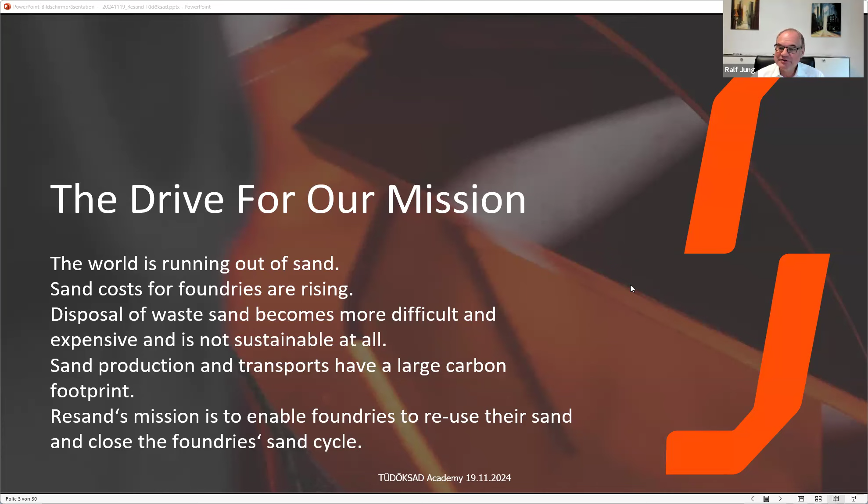Sand production and transport have a large carbon footprint, and more of the foundry customers demand the foundries to reduce that carbon footprint. RESAND's mission is to enable foundries to reuse their sand and close the foundry sand cycles.

We have about 50 billion tons of sand mined every year, and this is a limited resource. We see high carbon emissions for the production and transportation, and an increasing challenge for foundries to dispose waste sand. In some countries, like in Spain, this is going to be banned in the near future. Therefore, we believe that reclaiming the sand in the foundry is the most sensible solution you can have.

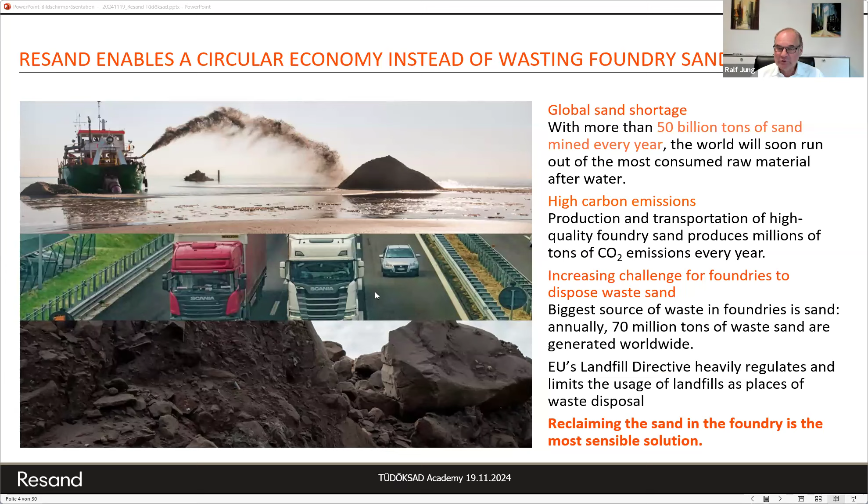Why do we do what we do? The company RESAND's former name was Finn Recycling, and it was a scrap dealer.

When Tony Vezin, the founder, was delivering scrap metal to a Finnish foundry, he was asked if he could help with the sand as well. Because in Finland, you don't find quartz sand in high quality. Most Finnish sand contains a lot of feldspar and therefore has very poor thermal properties, and it can't be used in a foundry. So the Finnish foundrymen have to import their sand normally from Belgium or from Germany, and then it has to be put on a lorry, shipped to Finland using a ferry, which makes the virgin sand very expensive when it arrives in Finland.

RESAND was founded as Finn Recycling more than 10 years ago, providing metal recycling service for the foundries. And then after Tony was asked to do something with the sand, he had a chance by acquiring a former glass factory in Nuutajärvi.

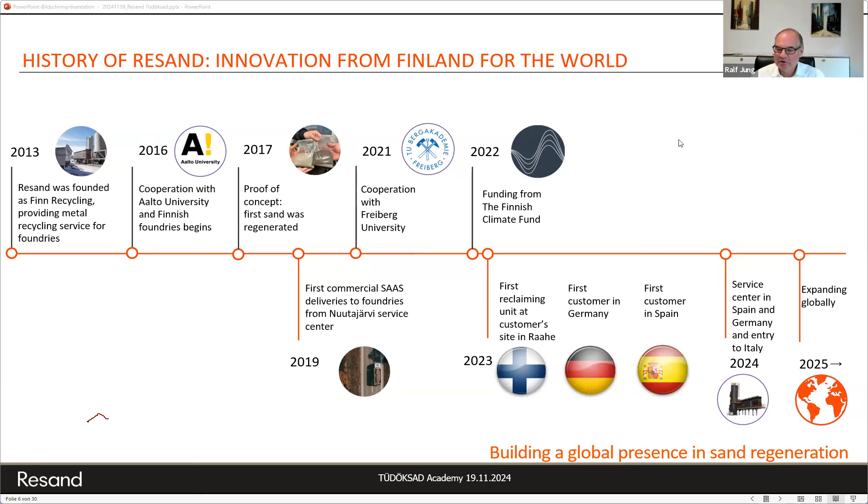Our technology. What's basically the idea? Tony Vezin started the development together with 5 Finnish foundries. So it's not just an academic approach, but it was basically the foundrymen's demand. They wanted a continuously operating, easy to install, automated system which needs no operators, because people are expensive in Finland. And the quality of the reclaimed sand should be so good that it bears no risk for the casting process.

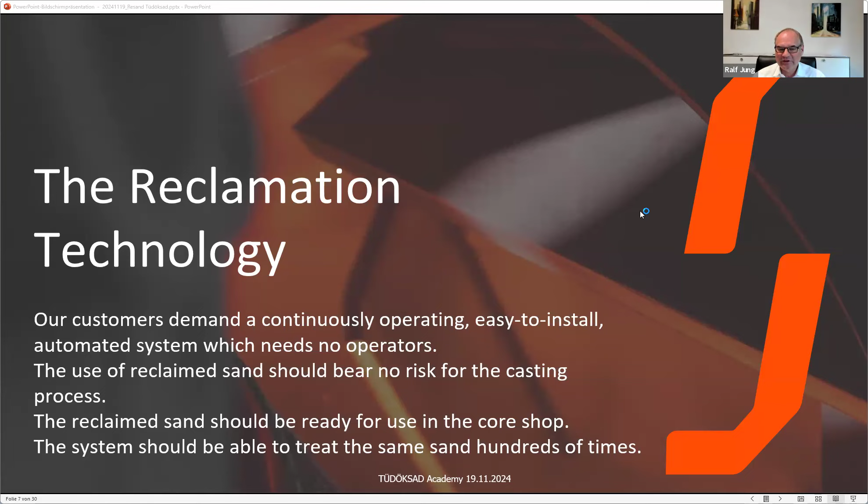Basically, the reclaimed sand should be ready for use in the core shop, mainly cold box core production. And the system should be able to treat the same sand hundreds of times, because when you always have to replace 5 or 10% of the sand, you'd have to import again from Germany or Belgium, which your foundryman didn't want to do. So we had some border conditions, for instance, the grain size distribution, which shouldn't be affected by the process.

So what's basically the model: molds, casting, pouring of the iron into the mold, cooling and unpacking, and then in general 70 to 90% of the sand can go back to the molds for mechanical processing. Normally, the fresh virgin sand is introduced into the foundry sand system by core making. But if you get new sand into the system, you have to take out the same amount of waste sand and put it to disposal and landfill to keep the system at a constant filling rate.

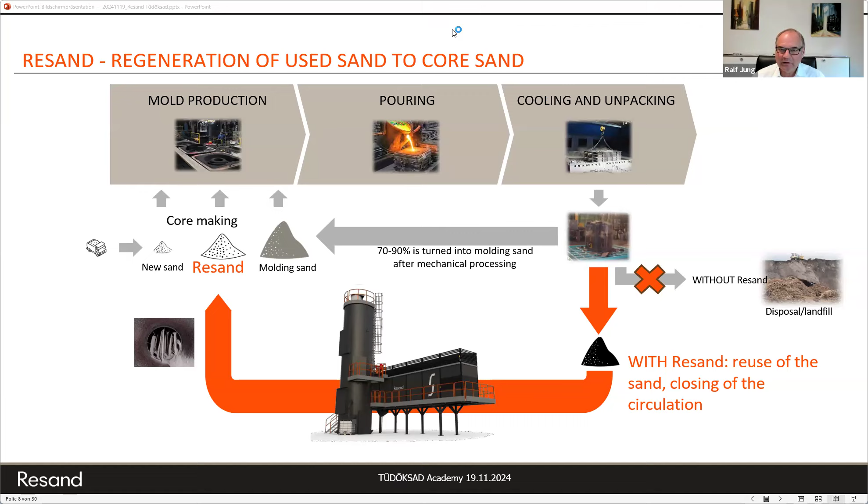So our technology is basically about treating the sand to reuse it in the core shop. How do we do it? We basically use a twin drum system for thermal mechanical reclamation.

The first step, the upper drum, the heating drum, is cleaning the sand with thermal reclamation. Everything, including the binders and additives which are combustible, are burned in the heating drum. Then we have dedusting and cooling in the second drum.

But as you can see in the picture of the dedusting drum, there's a little bit more than just an empty drum. There are things in that drum which allow the sand to be in contact with other sand grains to clean the surface, and dedusting happens there as well. So we get a clean silica sand ready for use again, but we don't grind anything. We do not affect the grain size distribution, apart from taking some fines out with the dedusting.

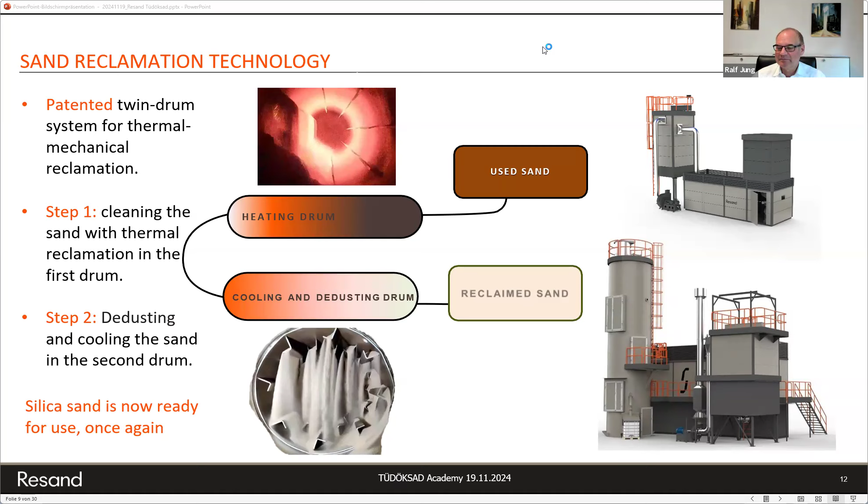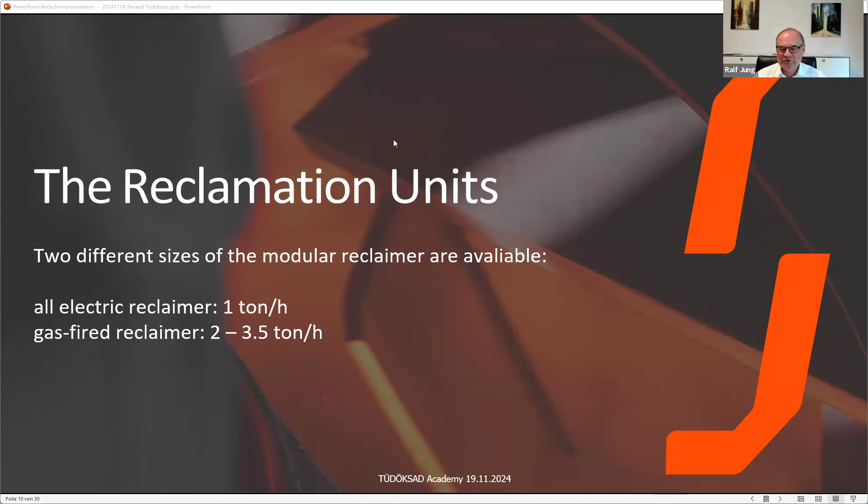Now you see the reclamation units we have. There are two different sizes available. We have an all-electric reclaimer with a capacity of about 1 ton per hour, and a bigger gas-fired reclaimer with 2 to 3.5 tons per hour. But of course, you can put 2 or 3 of the electric reclaimers in parallel if you don't want to use gas, which some of our customers, especially German ones, want to avoid because they don't want any carbon production in their system.

So let's start with the small electrical reclaimer. It's a completely digitally controlled unit. It's electrically heated, but not just heated, it has temperature zones with an electrical heating capacity of max 250 kilowatts. The zones and the regulation are controlled by constantly measuring what's going on in the system, as well as the exhaust fumes coming out, because we have to control the residual oxygen level.

There's a lot of process control involved in that to get the proper sand cleaning conditions, to acquire the proper conditions for the reclaimed sand.

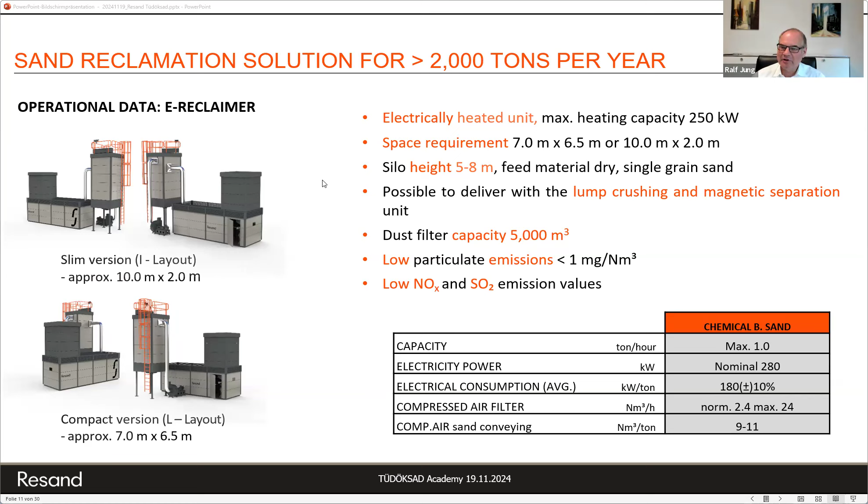This electrical machine is rather small. In an I layout, it's about 10 meters long including the dedusting unit, and 2 meters wide. You see the lower block is 2 drums, then the feeding silo and dedusting unit on the side. What we basically do with that is treat mainly chemical bonded sand for smaller foundries, like Furan or Alphaset or anything like that. We can do about 2,000 tons per year with that machine, which is for a medium-sized foundry.

All these machines can be placed outside, even in the harsh Finnish winter, so that you don't need to waste any space in your production hall. You can just place it near your core shop or near your shakeout to run it there.

All the particulate emissions are so low that the machine can be run outside, since it doesn't grind anything. The main noise emissions are basically from the dedusting, the ventilators from the dedusting system.

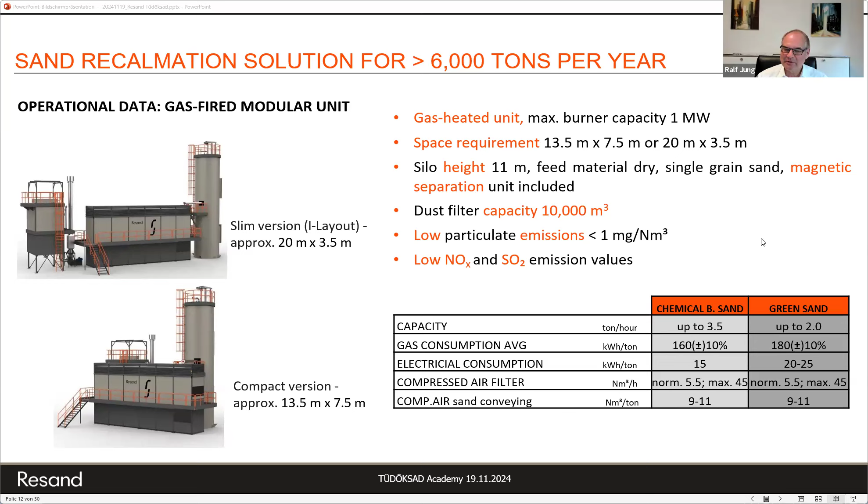For chemical bond sands, we can treat up to 3.5 tons per hour. For green sand, it's a little bit lower, because green sand normally contains some moisture and has to be dried first, which takes a little bit of the peak capacity. But in the end, we need dry single-grain sand. A magnetic separation unit is included because we don't want to have metal and scrap in the drums.

The main thing, if someone wants to run such a sand reclamation system, is that you can test the sand before. RESAND is not an equipment manufacturer, we are sand process specialists, so you're not buying hardware from us. As you may know from other companies supplying hardware to foundries, they turn the key and say, well, the equipment works, now it's your turn to find out how to run it.

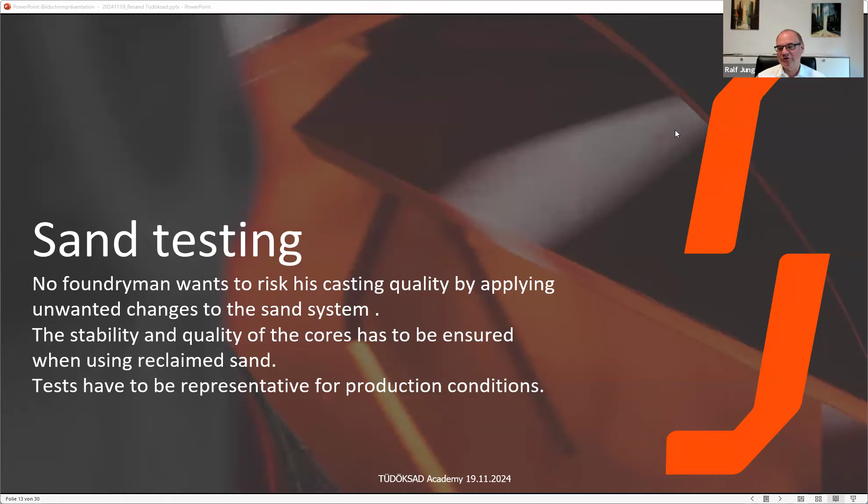This is why we put a production site machine in Germany, because Germany was our first target market after Scandinavia. In Scandinavia, foundries can bring their sand to the Nuutajärvi test center, where it can be tested under production circumstances. But here in Germany, we put a production scale machine at Freiberg University.

So German foundrymen can go there and see what happens to their sand, and just see what's coming out of the machine. We can run batch sizes of 5 to 10 tons. You can really do casting tests with the reclaimed sand, not just lab tests. It's a production unit.

Joint on-site testing. We have all the parameters that can be measured and shared, not only the sand parameters, but as well the exhaust gas parameters, and you can get the sand back for casting and test it in your molds.

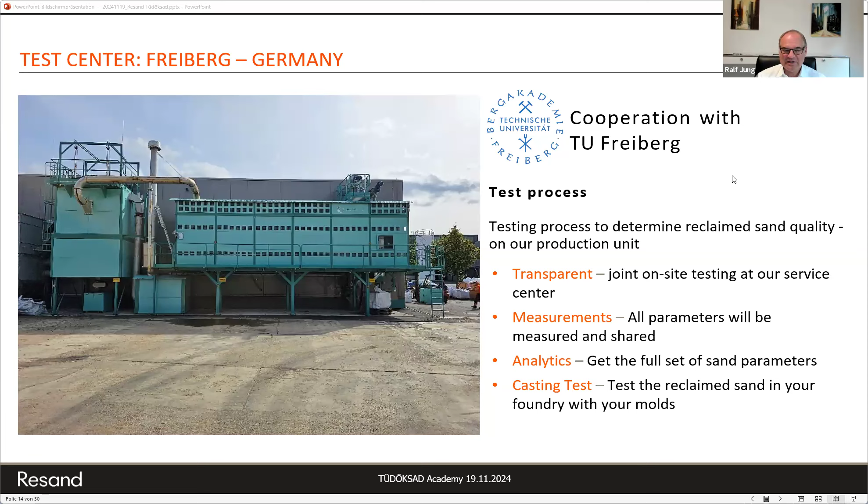The Nuutajärvi site is a little bit bigger. Here in the top left picture, can you see the mouse? I'm moving there. Yes, we see. Easy. Okay, so we have quite a lot of equipment.

Here is the silos and the back where we keep the different sand from the different customers. This here is a former glass factory, basically, and there's a lot of different equipment. We have the lab building here in the front, and the offices.

And a lot of there we have another a small testing unit. It's electrically heated. It's just for small lot sizes between 50 and 300 kilograms to test in here. And then we have a fully equipped lab where we can, with a small core shooter, do the bending strength tests, and we have everything we need here, not only for production, but for testing as well.

We can, in Nuutajärvi, in theory, do all types, all sand types. In Finland, there are some olivine sands in use. We could even treat inorganic bound sands, but we are not offering that to customers. At the moment, we are concentrating on chemically bond sands, mainly for the hand molding and steel casting customers, and for green sand for the larger automotive customers.

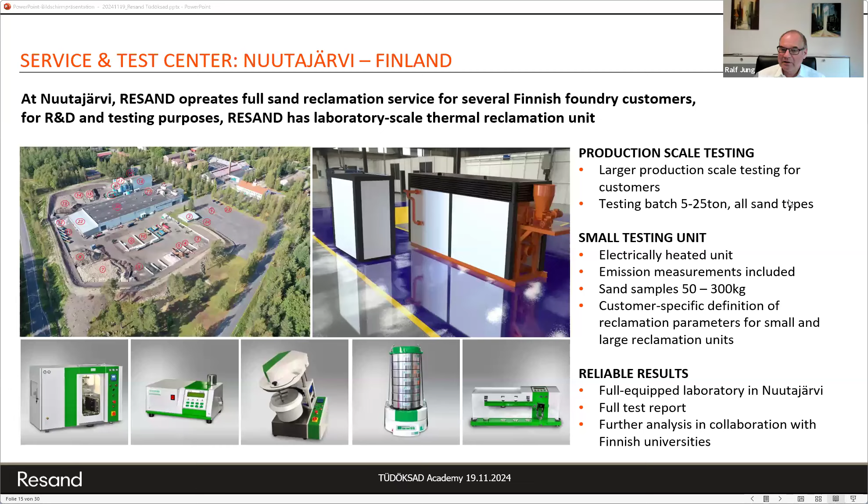And when we look at the sand which comes out of the RESAND process, we see basically it's clear and clean, regardless if it's phenolic sand. Before it was black, after it's white. It's resin and furan bond. It's cold box core sand, or it's from the cold box core scrap, or it's bentonite bond sand from the green sand molding lines.

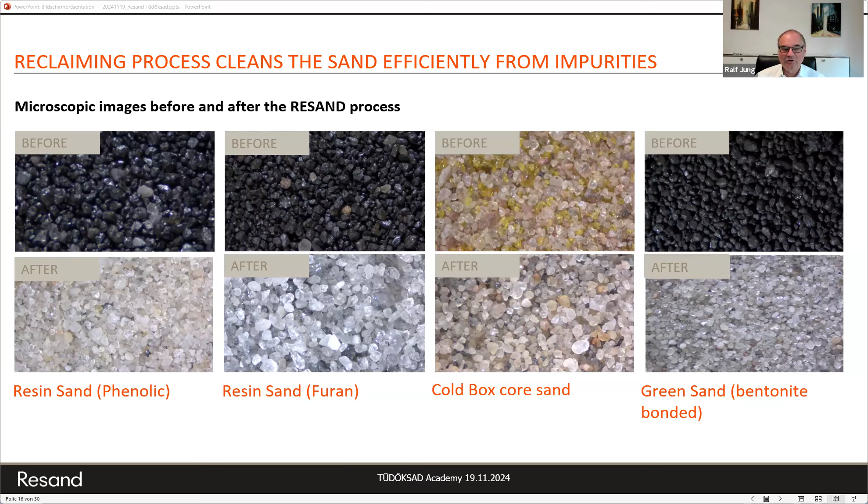Everything is efficiently cleaned from impurities and ready to use in the cold box process or in the form making process as well. To get that, we need to get rid of everything which is combustible. So the loss of ignition has to be the measurement for that. It has to be rather low to ensure the hardness of the cores.

Fines have to be effectively removed. We don't want to have dust in the sand, especially for the cold box core process. The pH value doesn't have to be too high, because then the binder system doesn't work. So we have to be well below 9 for the pH value, and the electrical conductivity, which basically gives an indication of the soluble ions in that mixture, has to be below 100 microsiemens for the cold box core production.

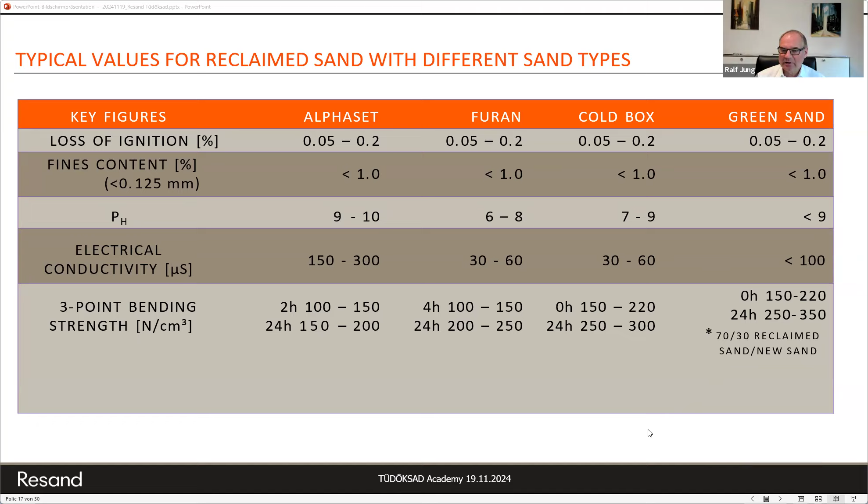So we can get 3-point bending strengths, which are normally quite close to the new sand quality. And only in very few cases do you have to add a little bit more resin to get the same quality there. The flue gas emissions are measured, and they are continuously controlled in our process.

That's on the Nuutajärvi site, and we see that all the relevant limit values, we are well below all the relevant limit values for our exhaust fumes. So you shouldn't have a problem with environmental permitting.

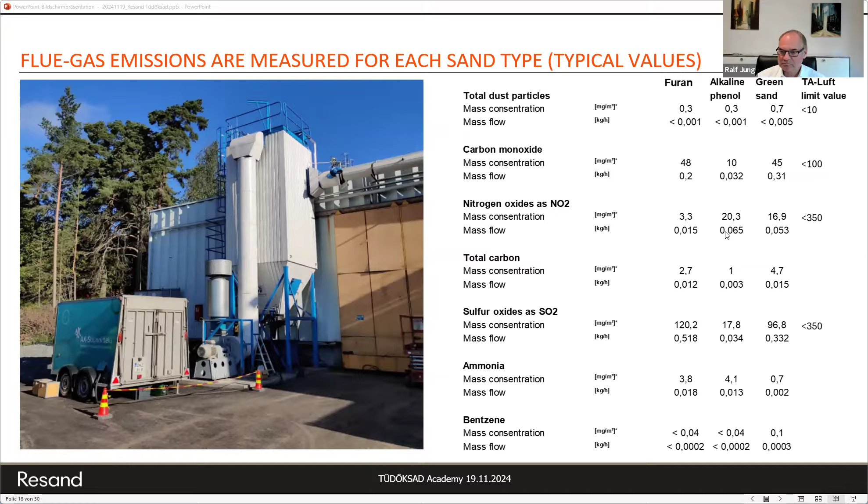We started with resin bond sand, the Finnish foundries, because only one foundry used green sand. And reclamation of green sand is a little bit more tricky than the reclamation of resin bond sand. In resin bond sand, you just burn off the binders, and that's it. Well, not for alpha set necessarily. There you can do something wrong, and then you get a glassy surface on top of the sand grains. But because of the polyphosphates, you need to have some more mechanical attrition after the thermal process compared to resin bond sand.

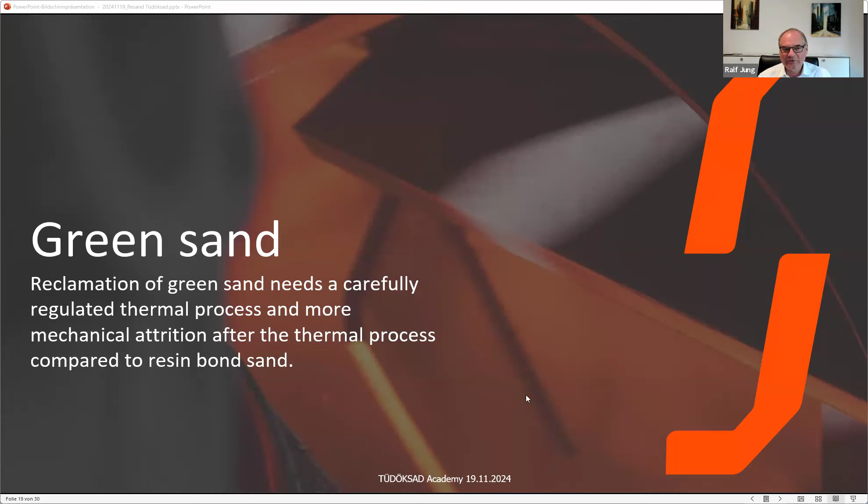For the green sand, when we look at what our customers demand from green sand reclamation, you see, of course, there's some residual carbon in there. This can be burned, no problem, but you have to control this burning because the carbon has a very fine particle size. And if you apply too much heat in a very short time, there's some risk that the reaction goes out of control. So you have to control the residual oxygen content in your exhaust gases and the oxygen and airflow for the reaction.

And then you have basically two types of water in the bentonite. It's crystal water and structural water, which has to be taken out, and this has to be done carefully. It's not wise to apply too much heat in a very short time and go with a very high heating rate, like often happens in a fluid bed reactor.

So you will get - you have to avoid that the deactivated, loosely bound, dead bentonite reacts with the silica grains.

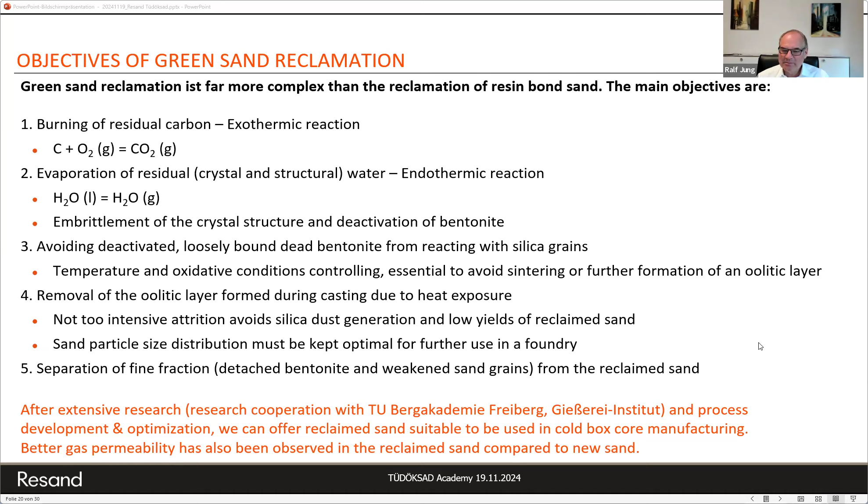Of course, you can use the sand in molding as well, but for molding sand, the quality requirements are not as high. What we observed is, because we are taking out some of the fines in the dedusting unit, the gas permeability is a little bit better compared to new sand.

When we look at the microscopic images, here on the left, you can see there is some of the layers still sitting on top of the sand grains. We have some here, it's open, but it's not removed, but you can see it's not sitting very close. It has been loosened. So what we have here is basically

the shell of the bentonite, which can be taken off by secondary attrition, where sand moves against sand, and with that process, you do not affect the sand grain distribution.

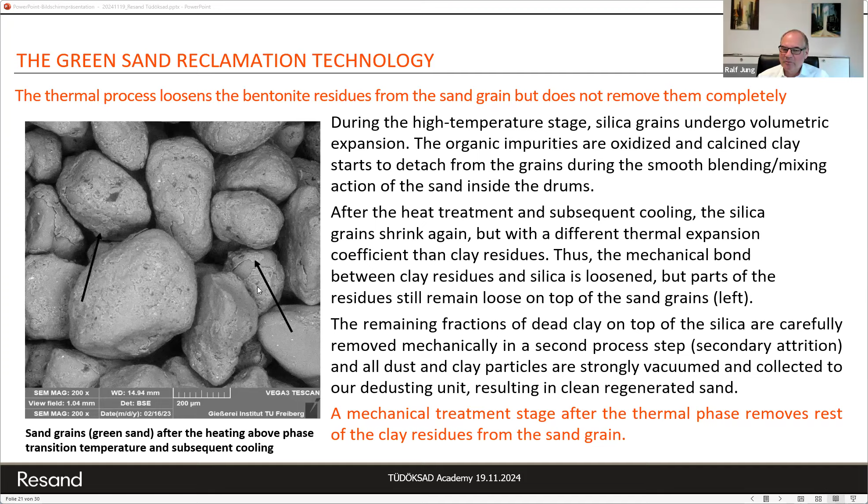So we need a mechanical treatment that removes the rest of the clay residues from the sand grain. It's not just a single process, but here the secondary attrition is a bit more important. And then we have a rather clear image of the used and reclaimed sand.

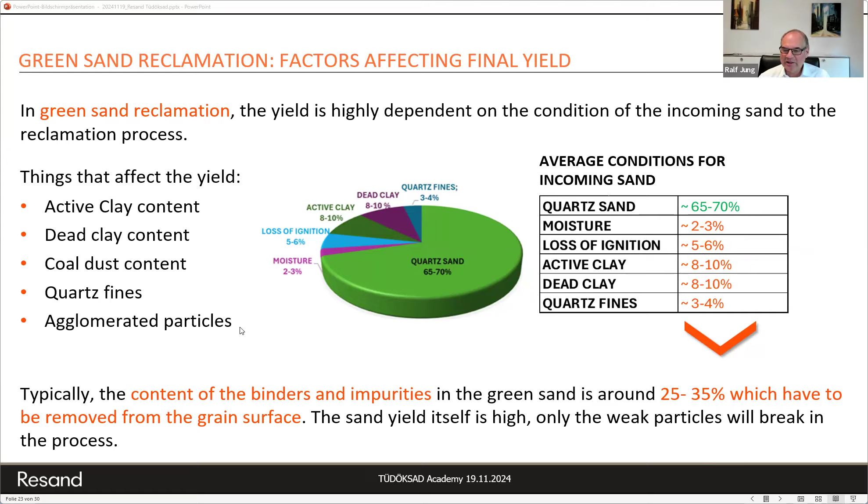We have been talking to quite a lot of foundrymen, especially here in Germany, and if you want to invest into some equipment and go to a bank and ask for a loan, it'll be difficult to get it. So we decided if we want to place some of our units in the foundries, we have to find another business model which doesn't need so much investment for the foundries.

So what we basically do is we offer sand as a service. We service you with our equipment at the site of your foundry. We place it there, but it remains ours, and you pay per ton of sand processed. This means CapEx is as low as possible, and you do not need to discuss with your bank. Maybe just put another silo in there, but that's not 100,000 euros. The sand reclamation, the process, and the quality of the sand is our business.

So every one of our machines can be remotely administrated from our Finnish base in Nutajärvi. All the machines are connected via the internet. We can see and watch the process, we can regulate the process if necessary, and we have some predictive maintenance there as well. So we can see if some of the bearings, for instance, is getting hotter. We can send a technician out to fix a problem before it occurs.

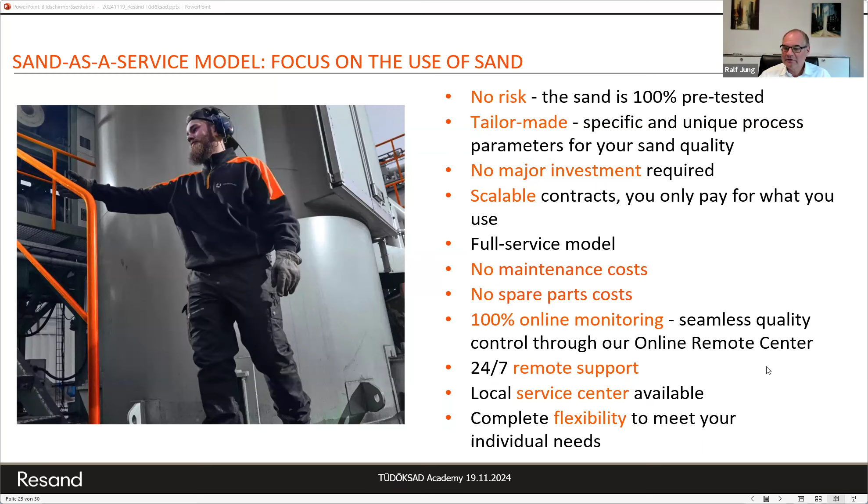We have an online remote center, with people there 24/7. For each country, we will have a local service center available because there's no way of flying in technicians from Finland to Turkey. So when we enter Turkey, we will act with a local partner who can do the service there. This gives us the flexibility to meet your individual needs.

This is a picture of the machine at Siempelkamp Foundry in Krefeld, Germany, one of the 12,000 tons per year gas-fired units. In general, the customer is the operator. In Germany, Siempelkamp was responsible for the environmental permitting on their sites because they have other machines there and already have an environmental permit, so it's normally just an extension of that.

We take care of the maintenance and servicing, including the process monitoring remotely. The customer pays a service fee to us and covers the energy costs on site. For the electrical heated machine, it's the same, but instead of gas you just need electricity. So it's rather simple.

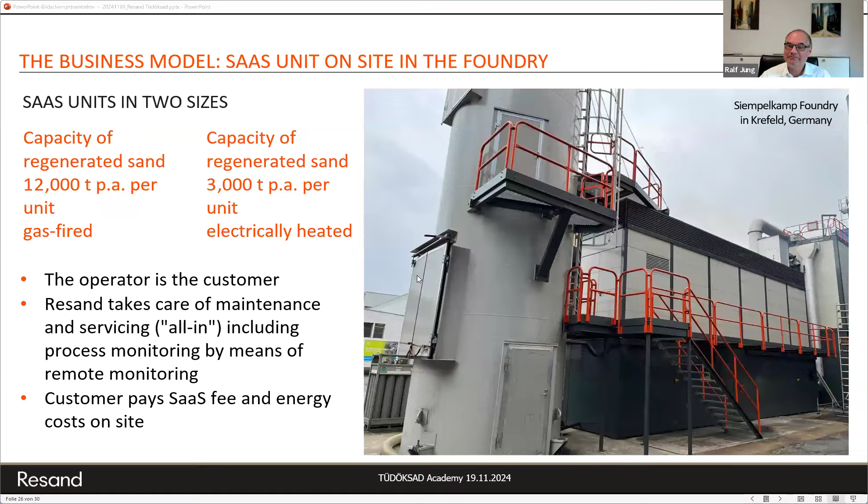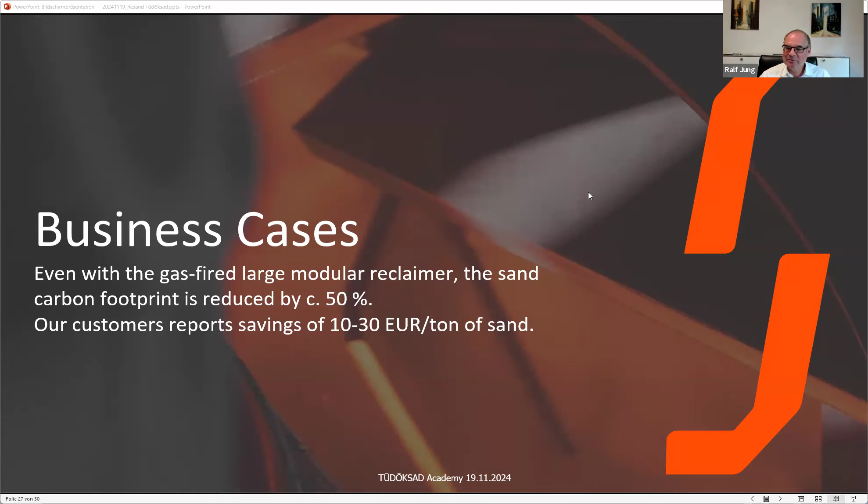What's the effect of that? Some people told me, well, we have to bring down our carbon footprint, our automotive customers demand that. But even with a gas-fired large modular reclaimer, the sand carbon footprint is reduced by about 50%. Most customers we have report savings of between 10 and 30 euros per ton of sand.

How does that happen? When you look at the carbon emissions virgin sand has, a lot of it is in the extraction and processing of new sand, because the sand normally is washed and then has to be dried, and this is often done with gas-fired burners.

Then you have the end-of-life emissions, and you need transportation—oh, this is wrong here, it's not gas, this is transportation—to bring the sand from the sand mine to the foundry, and to bring the used sand back from the foundry to the landfill.

And here we have, basically in the Resand transportation, we use some of our transportation by road. There it is, sorry. And then we need natural gas for the burners, and we have some carbon emissions from the combustion of the binders. But compared to the average carbon footprint for new sand, this is about half the carbon dioxide—about 60 kilograms of carbon dioxide reduction per ton of sand.

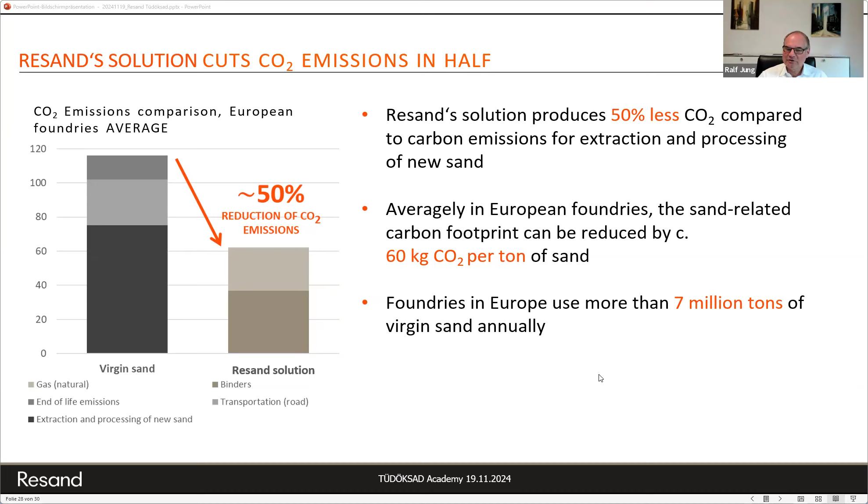Foundries in Europe use more than 7 million tons of virgin sand annually, so there's quite a lot of potential to do something good for the environment.

And when you look at the savings, 10 to 30 euros per ton of sand means that if you buy about 10,000 tons of sand per year, which is the capacity of the large reclaimer, this means an annual improvement of the result by 100,000 to 300,000 euros. You have to sell quite a lot of castings to get an additional result of 300,000 euros.

I hope this could give you an overview. That took three quarters of an hour, so we have half of our webinar time left for discussions. My colleague Mikko Immonen has joined me—he's responsible for the market areas and especially active at the moment in the Turkish market. Thanks a lot for listening, and I'm looking forward to your questions.